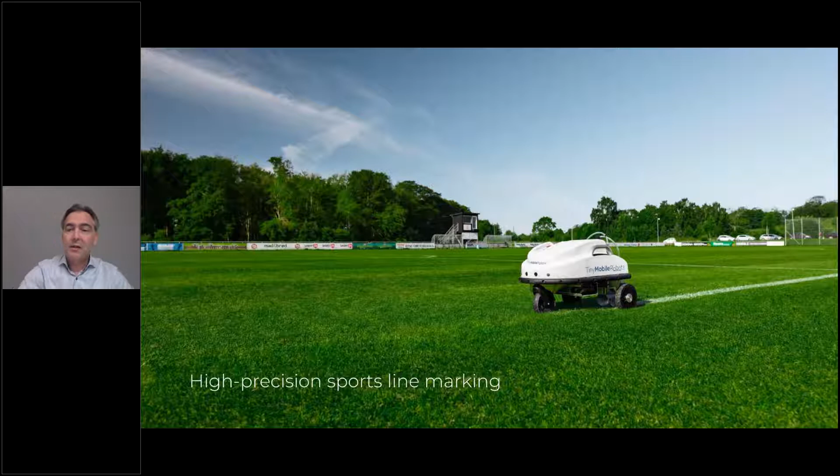Now we also set our mark in the sports industry, where we do layouts of football fields, American football, Australian football, rugby, tennis, Quidditch even. So that's also a big part of our business.

As we saw before from the example and the harbor in northern part of Denmark, one of the big challenges really is that setting out points or marking out points with traditional methods, that it can be a very tedious and time-consuming job. And some of our friends in Australia, Position Partners, they made a very good video that demonstrates the difference quite well. I think I will see if I can run that video here.

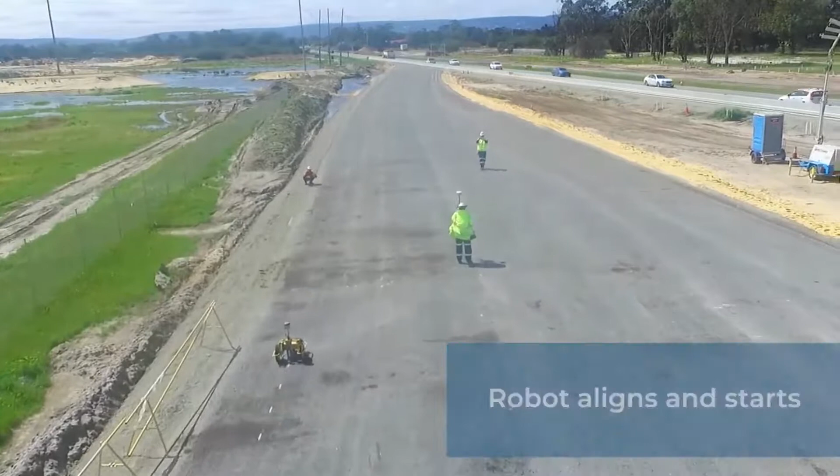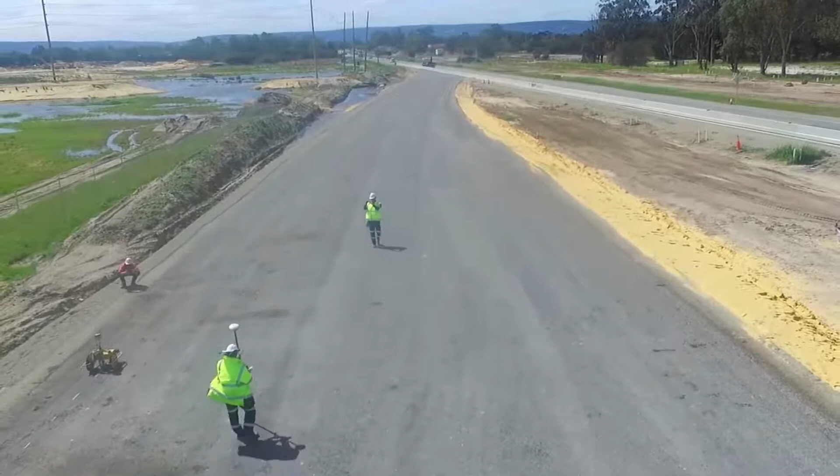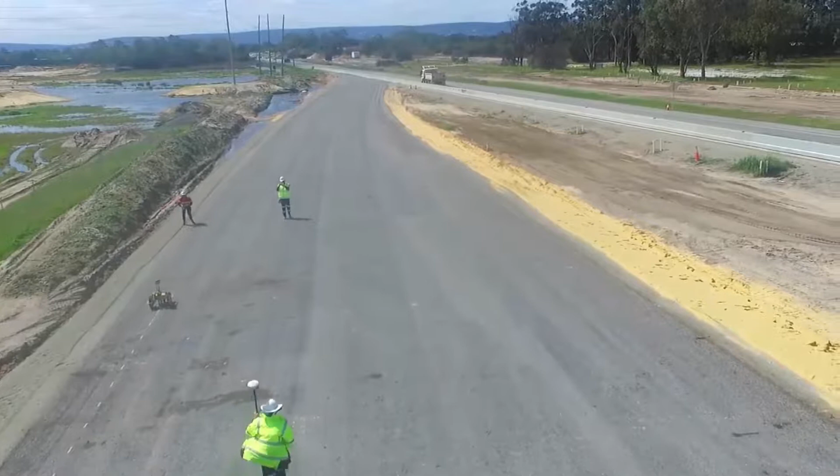It should be running now. So here you can see that the operator gets, I think it's a 10-meter lead, a head start here, and the robot is getting ready to mark out. You can see the robot is marking out quite a lot of points already here, and the operator is on his second point. And it's already caught him up very quickly here. So what happens, of course, is that after this operator has been marking out the points, they would need to be connected, these dots, with strings or paint to indicate the markings. And you can see the robot is really efficient in that way, that it just keeps working.

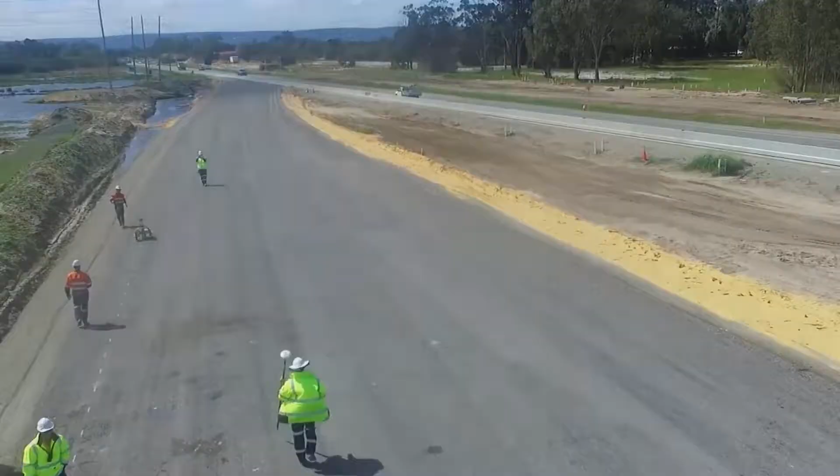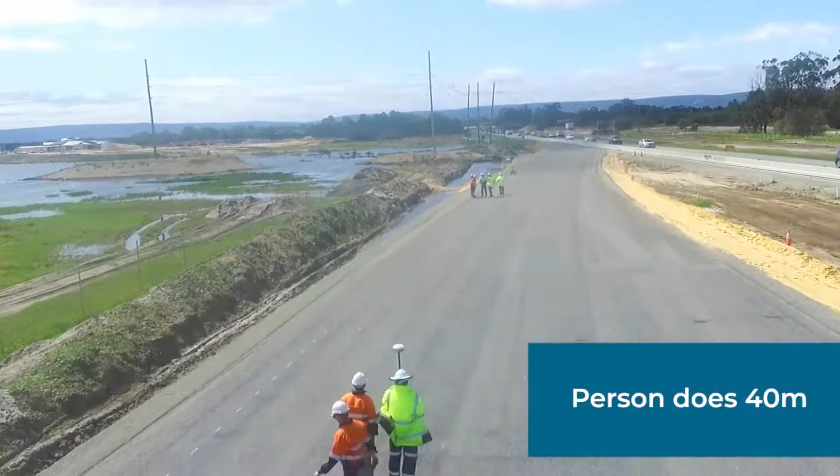So yes, what do you say Pelle? Is there normally a lot of people on these projects, or is it just the robot that works alone? Well, of course there are a lot of people here walking behind and around the robot. This is normally what we see when we're demonstrating the robot, because it attracts a lot of interest. But normally you would only need one person to operate it.

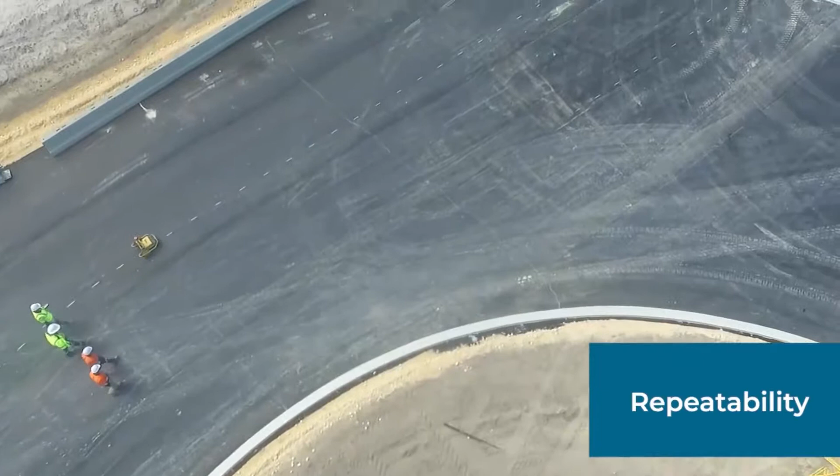I think this is also a good example in this roundabout, which is a more complex layout job, where the robot simply does what it's told, and it does exactly that. Laying out these curves in the roundabout is really efficient and fast.

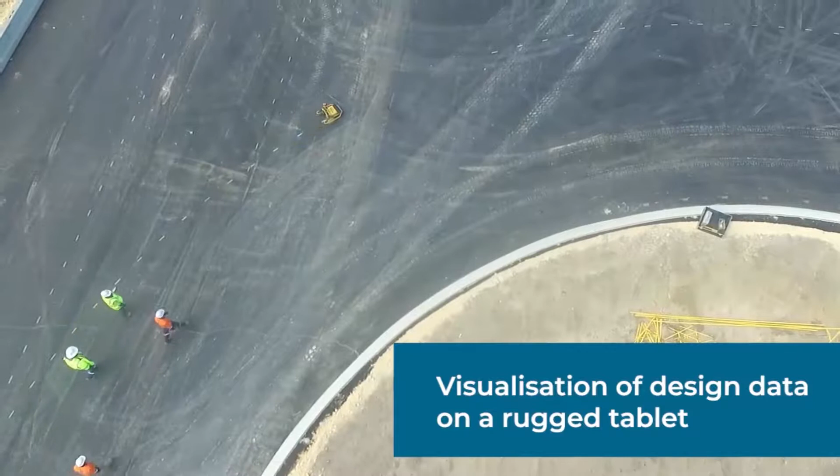I think it's coming up to the end here, and as you can see, it's working really well here. Okay.

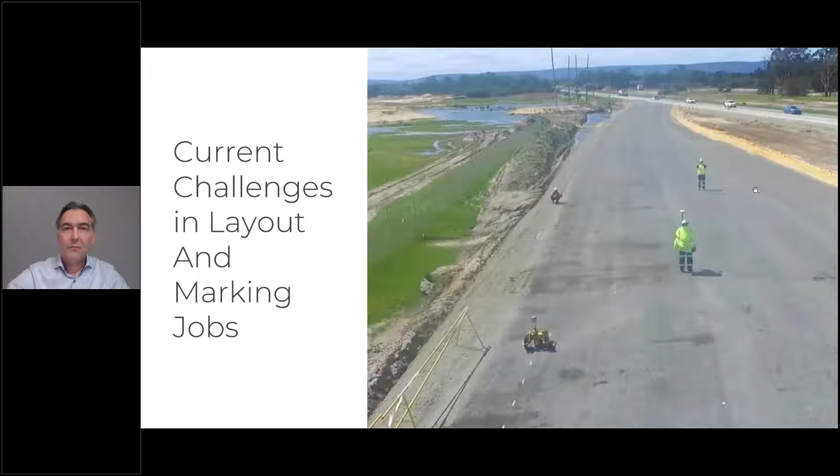Our customers are typically found within the land surveyor business. It's also a lot of construction companies, civil engineering companies, road construction, and the larger infrastructure contractors as well. That could also include projects in airports and harbor services, or we also have customers within airports itself.

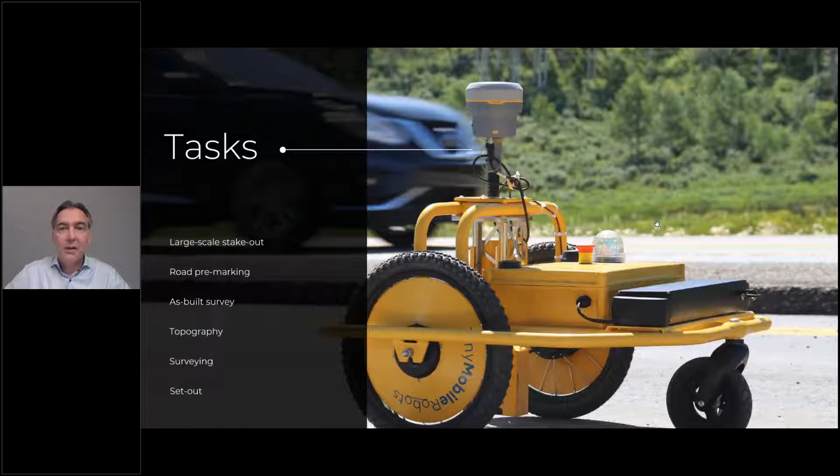The key outcome for all these projects is really how high quality a layout you actually get. It's based on known existing GNSS technology, so you can get 1 to 2 centimeter accuracy, and when you use it with a total station, you even get sub-centimeter, millimeter precision on your layouts.

As we've seen, the productivity is phenomenal. It's very fast - you can lay out up to 600 points per hour, compared to a traditional or manual method, which is more like 40 to 50 points. That actually gives us cost savings on projects between 60 and up to 90%, which is the feedback we've heard from our customers.

One important point, of course, is safety. It can never be underestimated how important that is, and we see it's ideal for working in hazardous areas - that could be heavy traffic, construction sites, etc. It really ensures a more safe work environment for our operators.

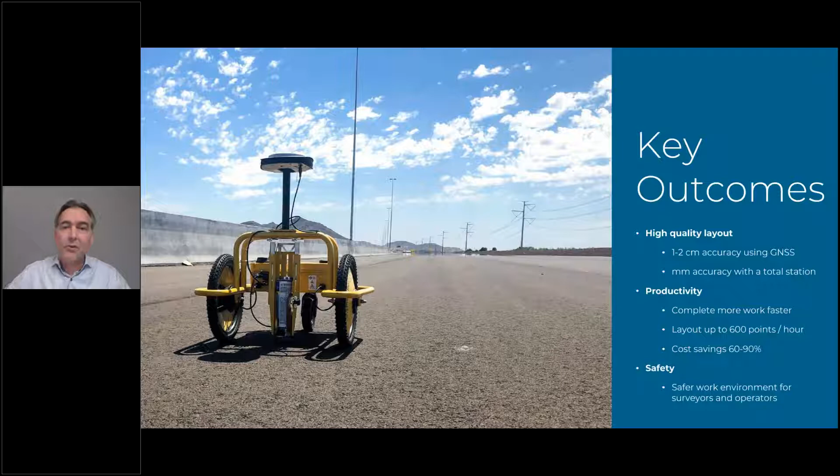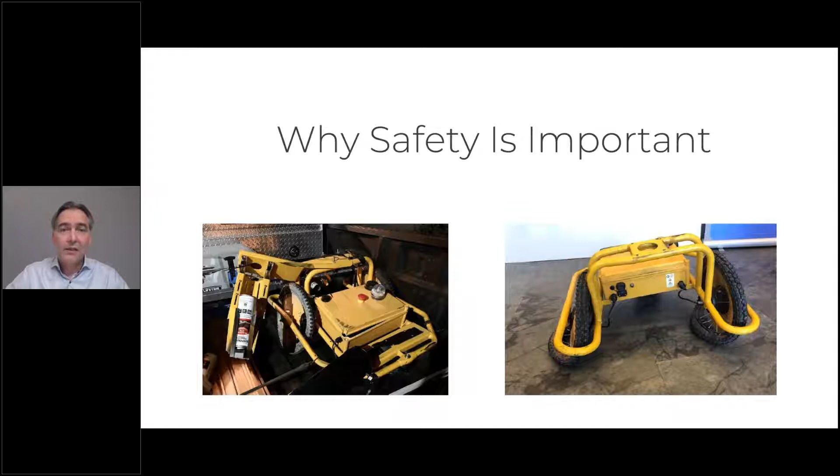Speaking of safety, we have unfortunately seen a few accidents involving the robots. The one on the left was crashed by a drunken driver in the US. It was very close, but thank God nothing happened to the operator - he was not facing the traffic, so he was operating the robot at a safe distance. The same happened in Sweden, but that was a milling machine that crashed this robot. It was a close call, but thankfully nothing happened to the operator there either. So that's actually a very important parameter to consider.

But again, it's productivity and efficiency that we come back to when we talk about the robot. And the larger the project, the greater the gains.

We also have this video from Position Partners in Australia - they took it to an airport where a new runway was being constructed. They were planning 50 kilometers of pre-marking, quite complex jobs with letters, numbers, runways, all sorts of things, around 50 kilometers. Just for the pre-marking, the budget alone was 5 weeks, and the robot actually managed to reduce that to only 1 week.

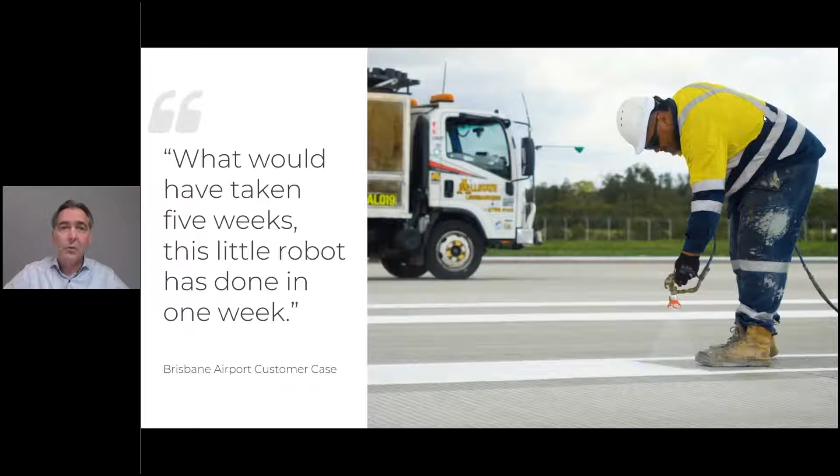So I'll see if I can run this video now.

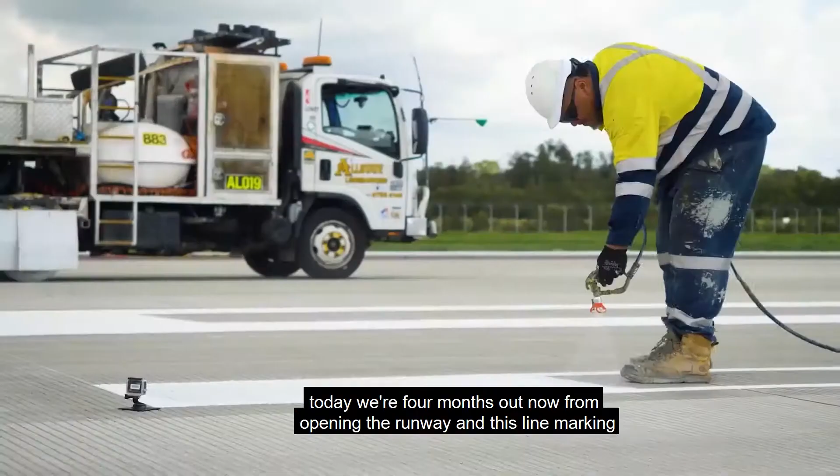Today we're 4 months out now from opening the runway, and this line marking is finishing off this $1.1 billion infrastructure. I've been told about the robot, and to come out and actually see it for the first time today, what would have taken 5 weeks, this little robot's done in 1 week.

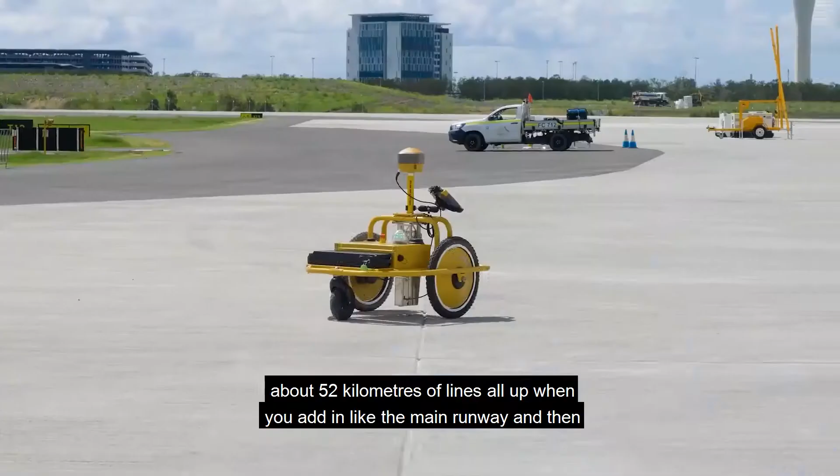One of the Position Partners reps suggested we've got this piece of kit, would you like to have a look at it? We trialled it. We calculated it was around about 52 kilometres of lines all up when you add in the main runway and then all the little offshoots. It just made sense to get it on the project.

When the line markers turned up, they just couldn't believe it. Traditionally, a surveyor is working in an unsafe environment, so safety is key, and that's what the TinySurveyor is doing, is removing some risk for the surveyor. Also the productivity, its speed and accuracy.

You can use a GPS to drive the robot from any manufacturer. You look at it from an overall health and safety aspect. That's what technology can do. It's actually saying, how do we make jobs, how do we make infrastructure a safer, more efficient way?

Coming to the end of the project, we just thought, look, we need to get this on board, and management was really keen to use something innovative. It's worked out really well for us.

Yes, and that leads us now to look a bit more into what it is that it actually enables us to gain so much productivity. And we will be looking now more on the TinySurveyor robot, and I will pass the mic on to you, Palle. Yes, thank you. I will try to spend the next 15-20 minutes telling you a bit more about what the robot is and go a bit more into the depth.

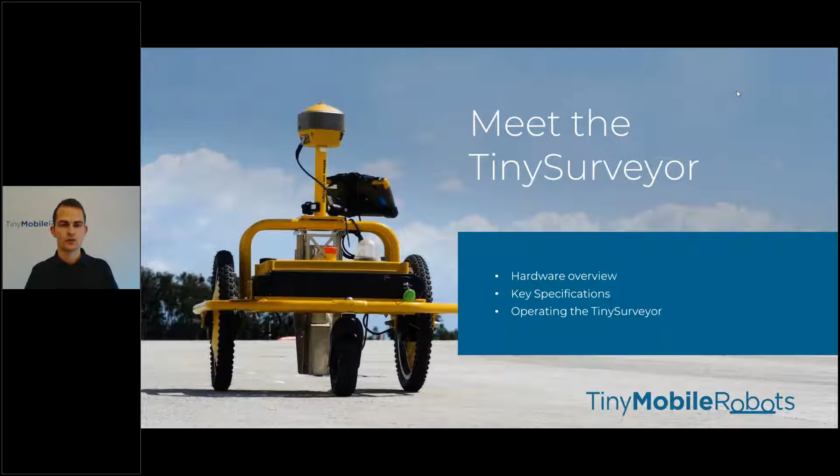I will start out by looking into giving an overview of the hardware. Then we will move a little bit into the specifications of the system. And in the end, we will have a look on how you operate and actually send commands to the robot using the app interface that we developed. But first, let's start with this overview of the TinySurveyor.

So what you see here are some of the key components highlighted, and I would like to take out some of the key considerations we had while designing this robot. One of them being that we like to have a platform which was very light and also very agile in the movements. As you see, we have here a platform that is only weighing 18 kilograms. So this means you can take the robot, put it in your car, and then go to the job site and deploy the robot.

Also for the agility of the robot, the way it can maneuver, you see that we chose to have a 3-wheel platform. So we have the front wheel, which is a small caster wheel, which can actually run around freely all 360 degrees. This allows the robot to be able to turn around on the spot. In the back of the robot, you see we have 2 bigger wheels, the motor wheels of the robot, and actually the motor is inside the hub of the wheel. So we have a motor dedicated for each of the wheels, and these are very, very powerful, strong motors. You can actually quite easily drive on flat asphalt or even more rough surfaces.

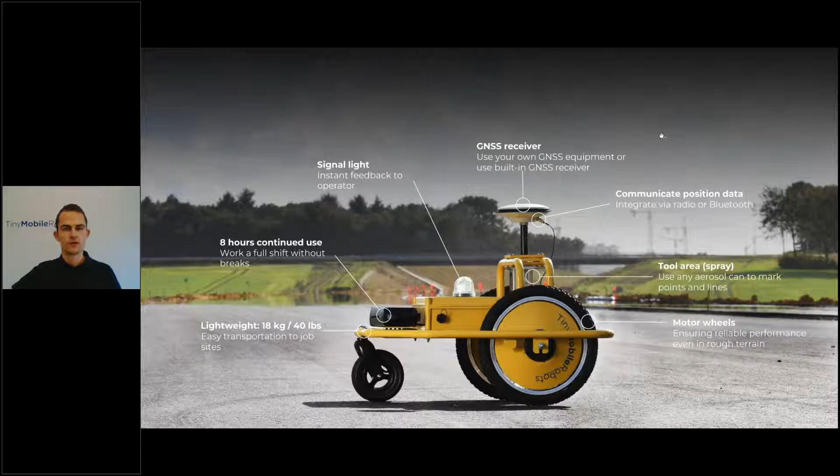But of course, all the hardware we see here is one thing, but also very important is the software inside the robot. If you should boil down the performance of a robot like this TinySurveyor, you could say we need to be good at combining the senses of the robot, but also good at designing or programming how the robot should behave. Here at Tiny Mobile Robots, we have a team of robotics engineers who, on a daily basis and throughout the past years with robots at different customers, have learned a lot. They've taken all that experience and developed a lot on the driving behavior and the general behavior of the robot to get to where we are today.

Then for the sensor side, we have on the robot several sensors, and I would say the most important one is the GNSS receiver you see on top. Alternatively, you can also use a total station, but this sensor is especially important because this is actually what makes us able to drive with 1 to 2 centimeters of precision, and wherever we drive in the world, we're able to say exactly within this accuracy where we are.

Combining other sensors also optimizes this position estimate. This is the motor sensor, where we can actually sense the whereabouts of the wheels, so for each wheel we can see where it is right now. Adding on top of that, inside the robot we also have an IMU. The IMU is kind of the balance nerve of the robot, meaning it can feel if the robot is tilted and if it's moving or not. We also utilize this for determining if the robot is driving on a slope, so it can tilt compensate for any slopes it's driving on.

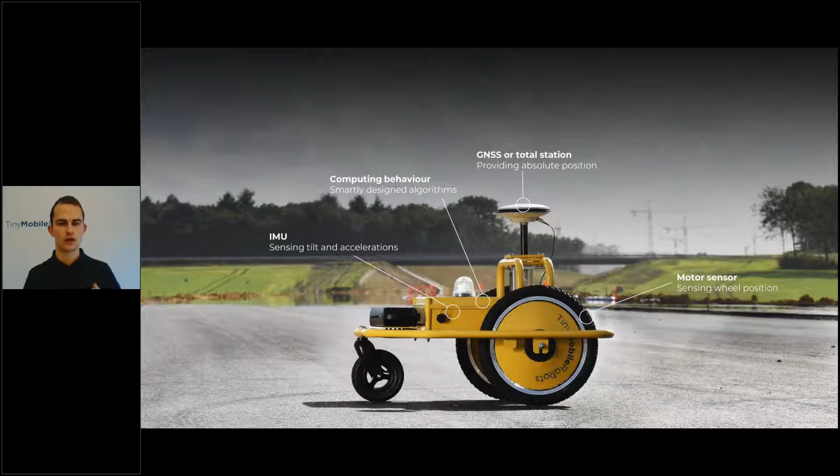Then talking a bit more about what you could call the hand of the surveyor, TinySurveyor, because this is actually what can perform tasks out in the real world. As Mads talked about, initially the robot was designed for doing height measurements, so as-built surveys of asphalt. But since we are based on customer needs, we also quickly learned that our customers could utilize a spray tool on the robot to make marks while out in the field. So we looked at what we could make, and we made this spray tool.

We allow it to use spray cans because we found that a lot of our customers are already using spray cans, and maybe you're also sitting out there with quite easy access to spray cans which you have on stock or similar. So you can use whatever height of spray can you like, and you can adjust the spray tool accordingly. You're also able to adjust the height of the spray tool, meaning if you'd like a wider line, you can do so. As you see, the minimum diameter and line width is approximately 2 centimeters.

With one big spray can, you're able to do approximately 600 meters of dash line, depending on how you set your dash design, or you could do approximately 500 points.

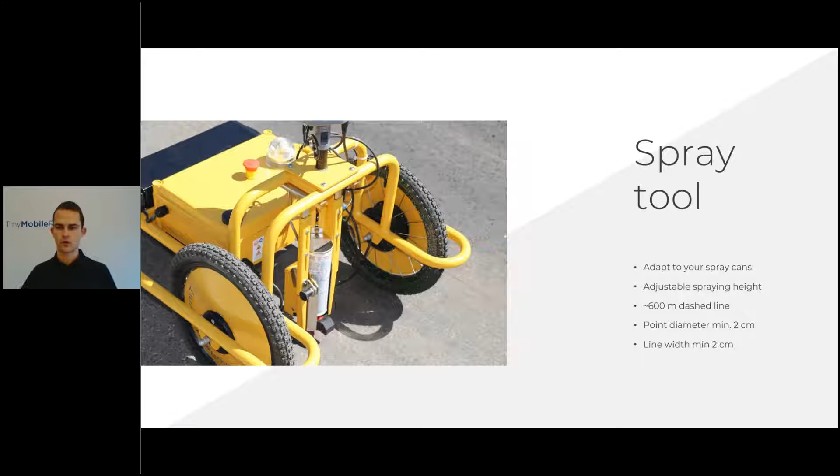Then, as an extension to this spray tool, you could say we extended the hand of the robot. We did this because while it's nice to have the spray tool in the middle of the robot, we also learned quickly that a lot of tasks require going close by a road or curb. So to be able to go close to a roadside, we added this side mount and put the spray tool on the side. Now the robot is able to be used for that too, for example if you are going to mark out the position of the next layer of asphalt and need to go close to the roadside.

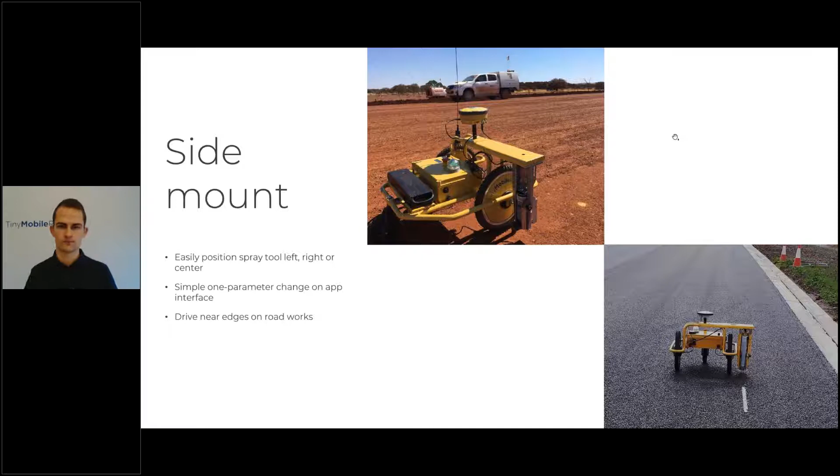Then going back to what I call the most important sensor for the TinySurveyor, namely the GNSS receiver. We know a lot of our customers are in the surveying business and already have a lot of equipment themselves, having invested money already, whether GNSS receivers or total stations. So we allowed and enabled the robot to be able to work with all this equipment. Whatever you have, Topcon, Leica, Trimble, or even a third or fourth brand, you can use this with the TinySurveyor. If you don't want to use your own equipment or don't have it already, you shouldn't worry.

We also have this variation of the robot called the Tiny Pre-Marker, and this one has a built-in GNSS receiver, so it's more of a plug-and-play solution, and you can quickly go out and use it right away.

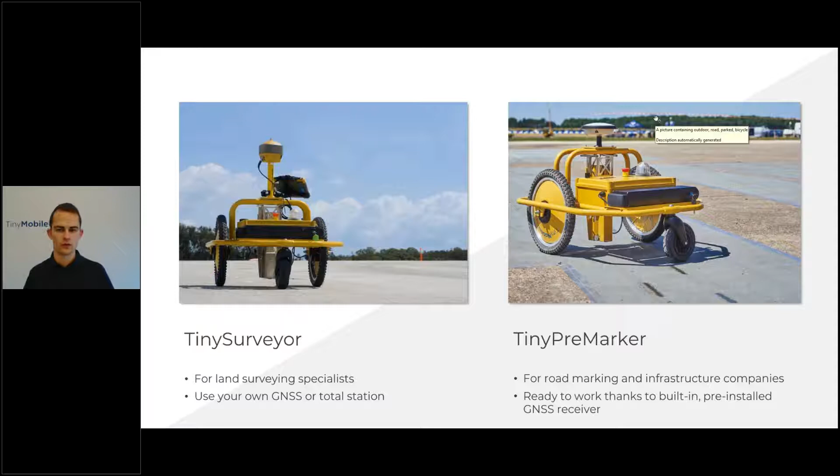Then sticking to this external equipment, but going a bit more into the specifications of the system: you can either use a GNSS receiver or a total station, depending on what application you are going to do. I'd say that for most outdoor applications, a GNSS receiver would be more than enough, because this gives you 1 to 2 centimeters of precision. Then if you're moving indoor or need higher precision, you could also add a total station to control the robot instead.

We allowed several interfaces to communicate with external equipment. You can communicate via Bluetooth, or preferably, you can have a wired connection via the RS-232 port found in the back of the robot.

Now for what is really interesting, because we are in the business of lines and points, this is what the robot can do: it can drive along a line, or it can go mark a point. For the line side, you need to have your design in a DXF file, load that to our app interface, and inform the robot what it should start doing. While driving along a line, whether straight, curved, or a combination, the robot can drive 1 meter per second, which is 3.6 kilometers an hour, roughly a slow walking pace.

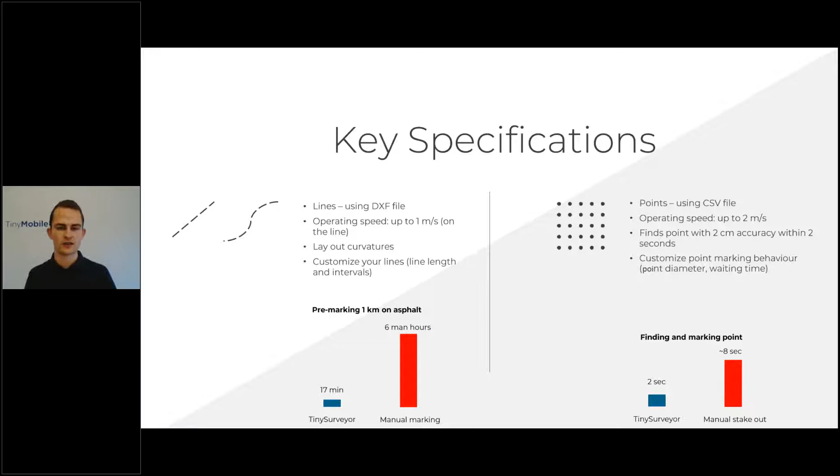So enough about the specifications, let's move a little bit into how you actually operate this robot and how you send commands to it. To do so, we supply a rugged Samsung tablet with the robot.

But now, to get a better understanding of this interface and the process of loading a job and starting it, I will start playing a video here.

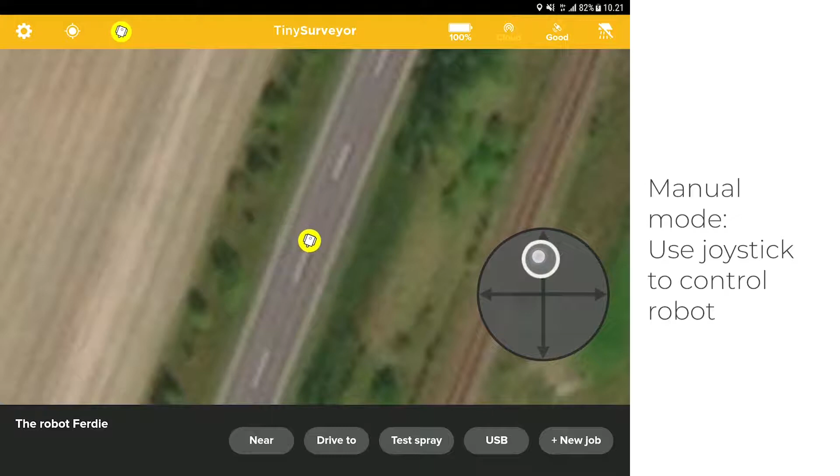What we see here is when the robot is all turned on, everything is ready. You see how I nicely maneuvered around using the joystick to the point I like to start. Then you see the USB button found in the right lower corner.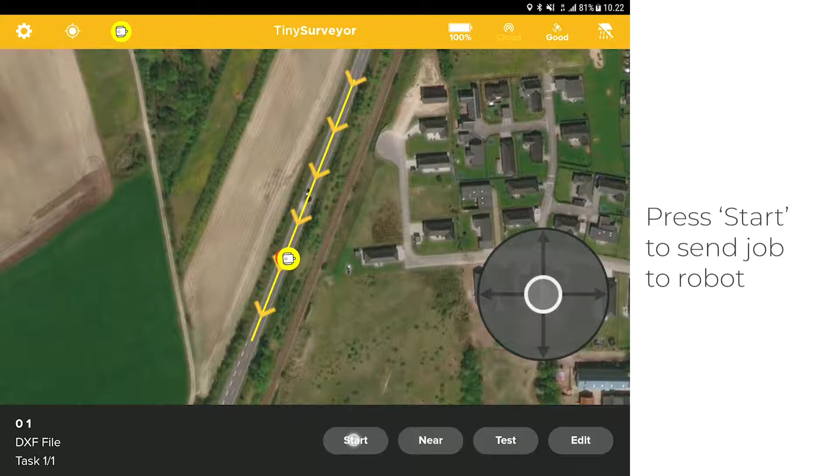When I press that, I can see the files I have on my USB stick. I load my file, which is a DXF in this case. I have a nice line displayed here on the app, and I choose whether I like to drive the north direction, and in this case I choose to drive in the south direction instead. Then I can press start to make it start at the point where the robot is, so you don't need to start always at the beginning of the line. And here you see how nicely it drives towards the endpoint.

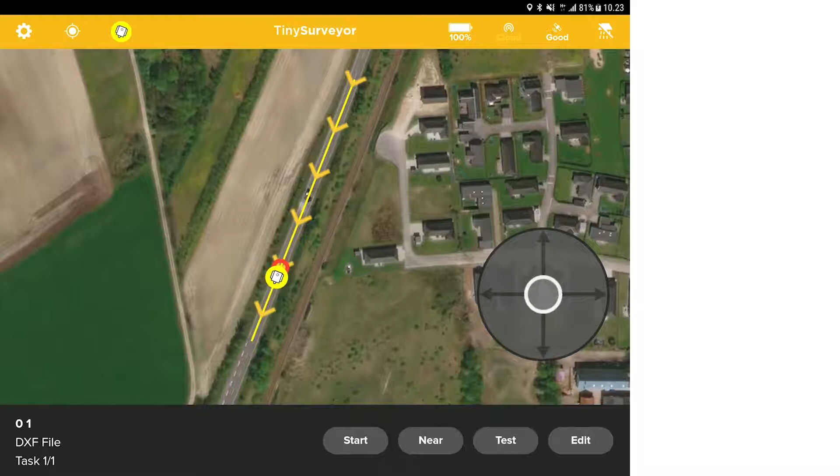So maybe you already kind of got the idea that what is really important for this robot to work is data. You have two ways of providing data to the TinySurveyor: either you can create it yourself, or you can have a DXF or CSV file providing it to you.

So we allowed the user to create data themselves. You can go into the app and select one of the predefined templates, going from simple points, which you can go out with the robot, collect, and then replay. Or you can draw lines, draw circles, or even more complex things like making a parking lot, or even defining an area where you can scan. So you can define a big area and have the robot drive back and forth and scan that area.

But I would say the most effective way of using the robot is with a DXF or CSV file, because then you have all the data predefined. Often what you see today, if you go to a project, that project is already digitalized. So you can take that, more or less directly input it in the app, and then have the robot drive.

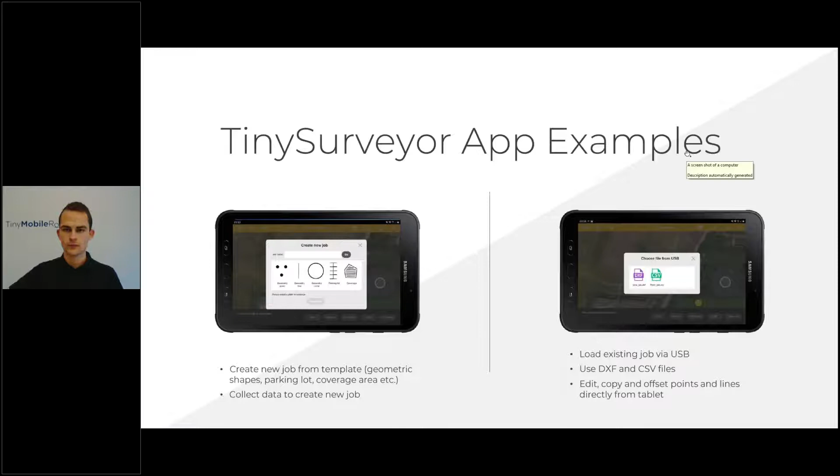But enough about the robot in detail. I think we should move a little bit more onto the customer side and see what our customers are actually saying about this robot, and how do they use it in the real world?

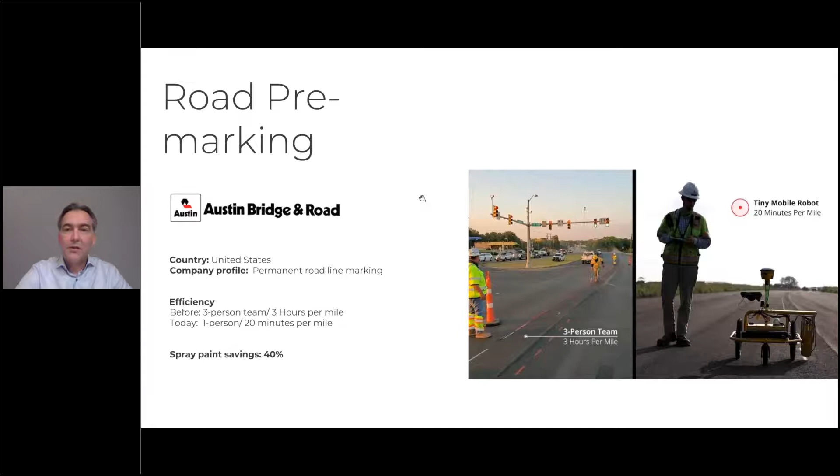This is a company from the US, Austin Bridge and Road. They do road pre-marking, and they gave us pretty interesting feedback on their experiences with the robot. They effectively went from a 3-person team taking 3 hours to do 1 mile of pre-marking, down to effectively 1 person and the robot doing it in 20 minutes per mile. You can also see a good example here how it works compared to the traditional method of manual spray, connecting the dots that the surveyor typically would mark out. Of course, the robot will mark out dashed lines or points, whatever is needed in the situation, making it really interesting from a paint-saving perspective too. So what's good for the environment is also good for the wallet in this case. That's a very nice example from the US.

Another company, Spotland, a Danish company, acquired the robot for a highway project in Sweden for pre-marking. They actually realized it could also be used for edge markings, here with the side mount, and also for indicating or setting out drill holes for safety barriers. This happens quite a lot — customers get the robot for one thing, and then realize they could also use it for this and that, which is very interesting for us to hear because it just expands the potential of the robot.

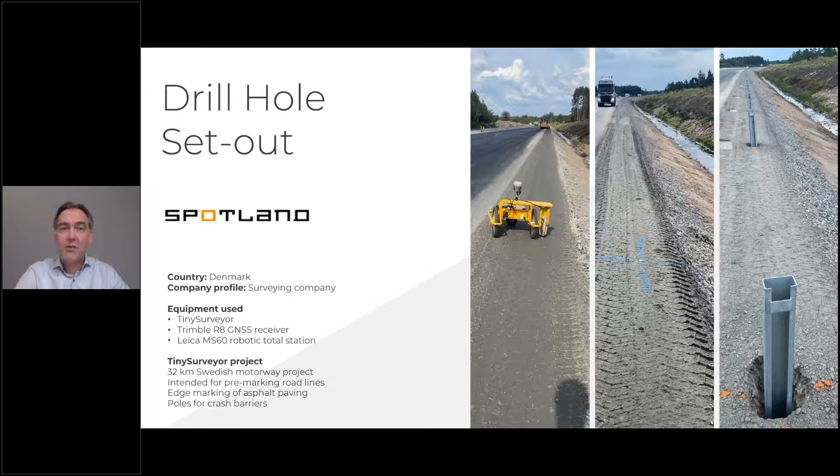Another really big industry we've been involved in is setting out solar cell farms. Those are typically massive projects that often need to set out thousands and thousands of points for installing all these solar cells. This is a company from Germany that got the robot a few years back, and they estimated around 35 points an hour they were setting out at the time. Of course, today they have more than double, should I say.

They are setting out 350 points per hour now, making them extremely efficient in terms of production time. So big savings in solar parks, absolutely.

We touched upon this before, that you could integrate or use the robot with a total station. This is typically used in indoor areas or areas where GPS reception signals are poor.

This is a German company that sets out exhibition halls. Very often they change the layouts, and then they have to mark out extremely precisely where the booth should be placed and what should be located where. Traditionally that's done with one operator operating the total station and another operator with the prism going around to mark the points. Today, with the robot, it's only a one person job.

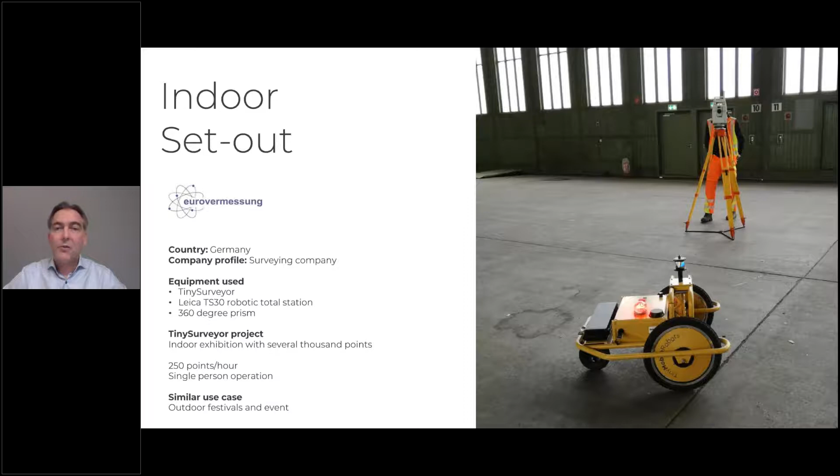And of course, the productivity is increased tenfold, with some 250 points set out per hour. They also do quite a lot of festivals and outdoor events, marking out booths and stands and these things. So really a broad spectrum of user profiles we see for this robot.

More complex logos, more complex setups that we are seeing users taking the robot to. As mentioned before, the robot will do exactly what it's told from the data. I really like this example from Austin where they painted their own logo on the pavement, which is some good food for thought and good ideas for what it can be used for. I guess it's only the imagination that is limiting its performance here.

But on a more serious note, the layout on airports is also very complex, and Pelle, I believe you've been involved in some of those projects, on Copenhagen Airport, was it? Yes, indeed it was. I was over at Copenhagen Airport seeing the robot being used there and getting to know how they could use it.

They quickly found out it was very good and very effective at drawing the long lines they have, doing that a lot faster. But we also found the robot was actually quite good at making the letters and numbers they had to do at the airport. Normally they had to measure those from some given points, which was kind of cumbersome and hard. But with the robot, you simply have the drawing on your app, and you can make the robot draw these letters and numbers quite easily. So this shows it's not only useful for very extensive, big jobs, but also for more complex tasks like these numbers and letters.

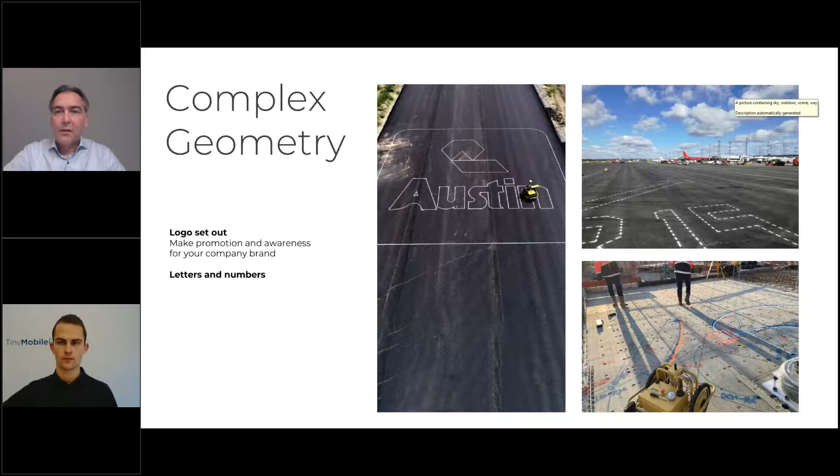Okay, there might be some questions on that, and that leads me to the next step in our webinar here, our Q&A session. We have had quite a few questions coming in, Pelle, so that's good. Are you ready for those?

There's one here from Mike: can you install the TinySurveyor app on any Android tablet? So what we do, we have the Rugged tablet from Samsung which we provide with the robot, and we pre-install this app that we develop on this tablet. It's not easy or cannot be done from our side to put the app on any tablet. We do this because it's easier to do support and service of the app.